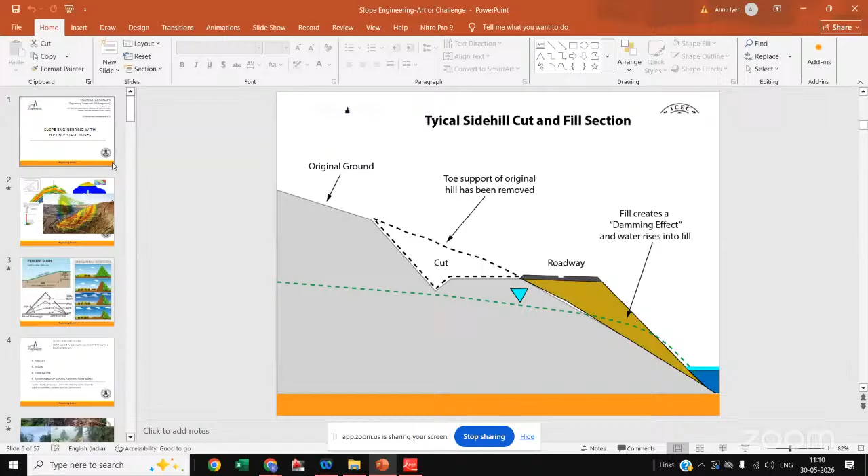So as we discussed, we will be speaking on slopes. Any railway infrastructure, or say any infrastructure, not only railways: roads, highways, or any industrial development area, or even a residential building development, of course railways, airports, mining.

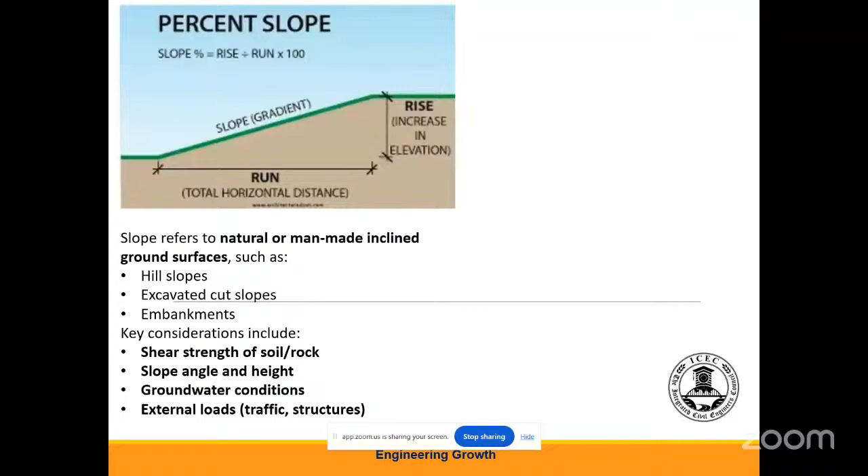So these are all the considerations we need to understand when dealing with slope engineering - groundwater conditions, whether it's at ground level or in some desert area where groundwater might be very deep. And loading conditions - what are the loading conditions, whether there's a lot of load or no load at all. Suppose shear strength of soil is high, slope angle is low, height is low, no groundwater, and no external loads - then we need not go for extensive engineering in that slope. But if it's the reverse case, we have to look into that. So these are the criticalities we need to understand.

Now coming to slope engineering - it is basically a specialized branch of geotechnical engineering. Geotechnical engineering has many subdivisions - slope, foundation, and foundation itself has many types, either shallow foundation or deep foundation. So many aspects are there in geotechnical engineering. In civil engineering itself there are 7 sub-branches, and within those sub-branches there are multiple further sub-branches.

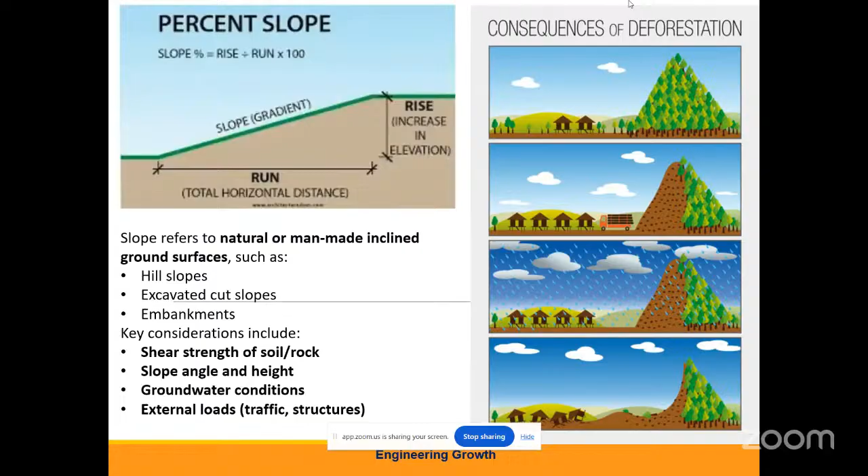Then comes the design - you take soil parameters, model whatever conditions are there at the site, and then run the slope stability analysis to find out whether the slope is stable or not. If not, you have to go for stabilization measures. And does it end here? No - analysis, design, stabilization are just the initial part of it.

Then comes the major part - maintenance of natural and man-made slopes. As I said, it's a continuous degradation process. However much we protect it, we're trying to increase that time period or reduce the effect of weathering. But maintenance is as important as analysis and design. So slope engineering deals with preventing slope failures.

So when we talk of slope failures, these terms come up - landslide, collapse, rockfall, erosion. Are these the same? No, all of them are different.

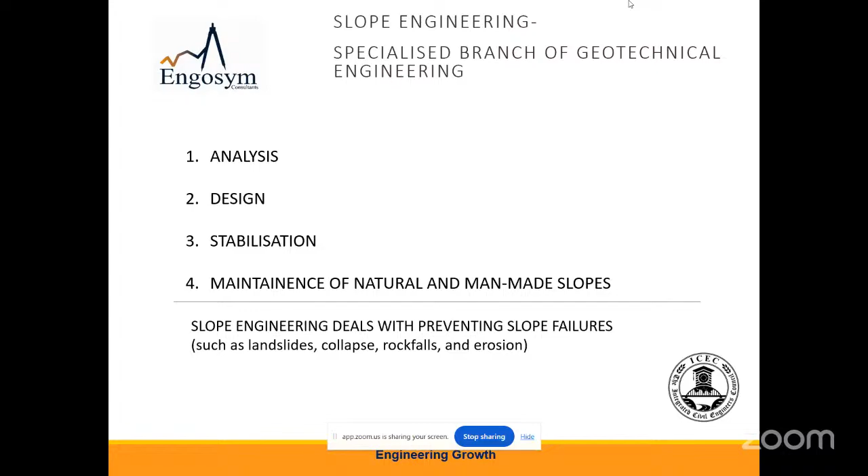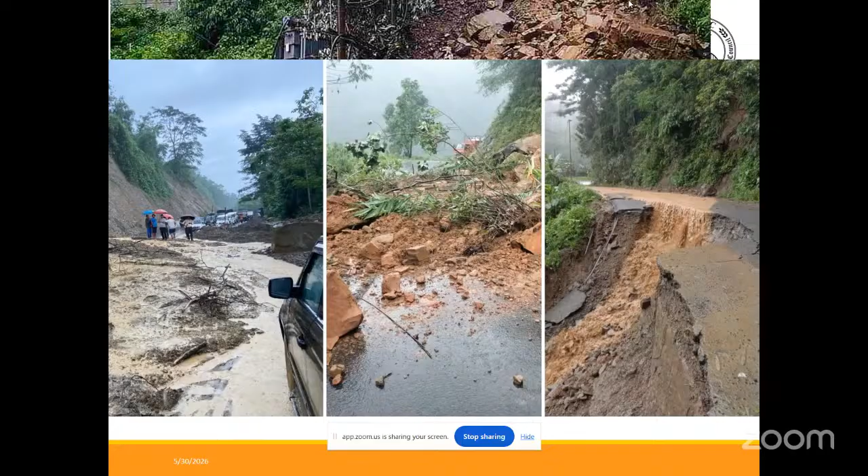Now this is a typical sidehill section, let me explain. Instead of a roadway, you can consider a railway - of course railways are not this critical, but we can still deal with such conditions. You can see a typical cross section here. In this cross section, what we see is the original ground. This is a typical hill road, or you can imagine it as development of a railway through a hill cutting.

So now to extend this existing roadway, or for widening of the existing railway line, we'll have to cut - we have to cut the slopes from this location. It's coming towards the inside of the slope, and in that case what we are doing is removing this base portion.

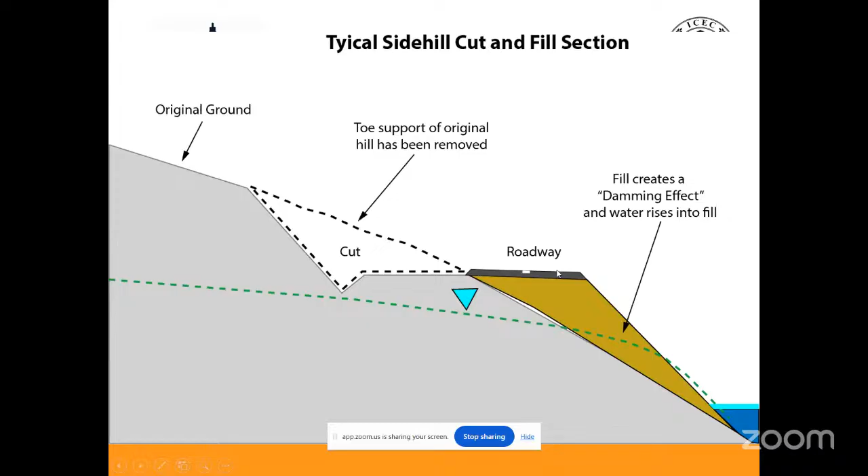Okay, so thank you whoever answered, thank you very much. So now mechanics of slope failure. We have understood that which are the portions to be treated. Now let us understand how slope fails.

So when we have natural terrain which is not suitable or which is prone for failures, in addition to the climatic conditions, when I say climatic conditions, it is not only monsoon, it is also alternate wetting and drying condition. आपण स्नो एरियाजमध्ये पाहिलं, जेव्हा आपण नॉर्थमध्ये जातो तिथे स्नो आहे.

So what happens is in winter season, this snow material enters into the pores, and in summer season, these snow or this ice material which is now in between the pores starts melting, and it starts moving from its place. So this is again a climatic condition which we need to deal with. So we are very familiar only with rains or monsoon, but there are things beyond that as well.

Then we have seismic coefficients and definitely the human intervention. So all this together, it can become very conducive. When I say conducive, it means a favorable environment that can lead to highly unstable conditions in the hillside and the valley side. So how can the failures occur? So this is a slope failure, a typical slope failure.

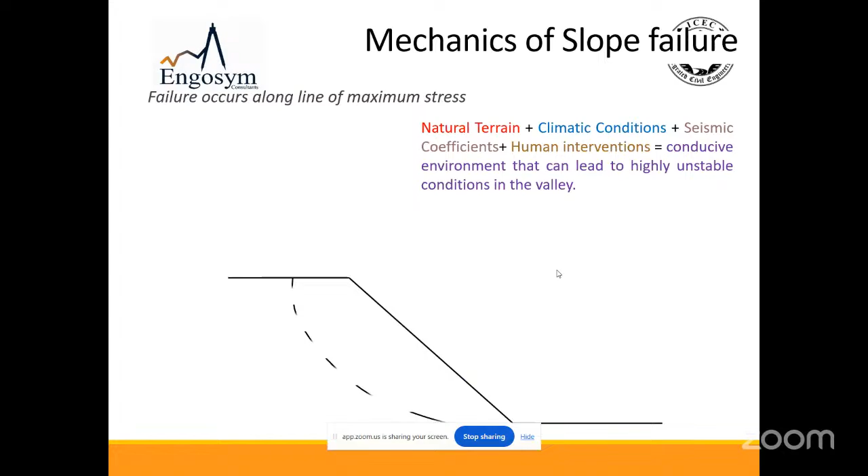Localized failures aside, depending on the terrain and climate condition, the amount will vary, whether it will be a smaller amount of slope failure or a bigger amount. Okay, so this is about the mechanics of slope failure.

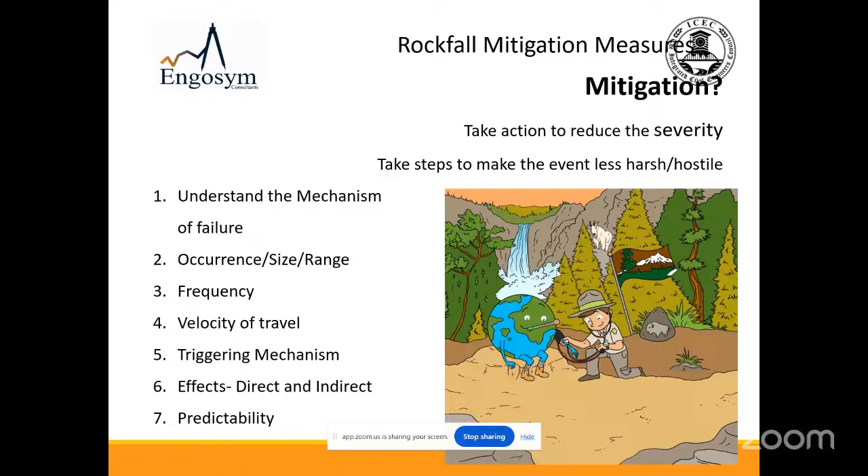Coming to landslide measures and how to do that. When we are talking about rockfall mitigation or landslide mitigation, it is very necessary to understand the strategy of it. That is, how do we map it, what is its inventory, what is the susceptibility, and how much hazard and risk. Then geotechnical evaluation, a very, very important parameter.

In geotechnical evaluation, there are again a range of tests that we can do. It starts with geotechnical investigation, geophysical evaluation, site survey, then understanding, as I said, the triggering mechanism, and finally the effects. So these will form the strategy.

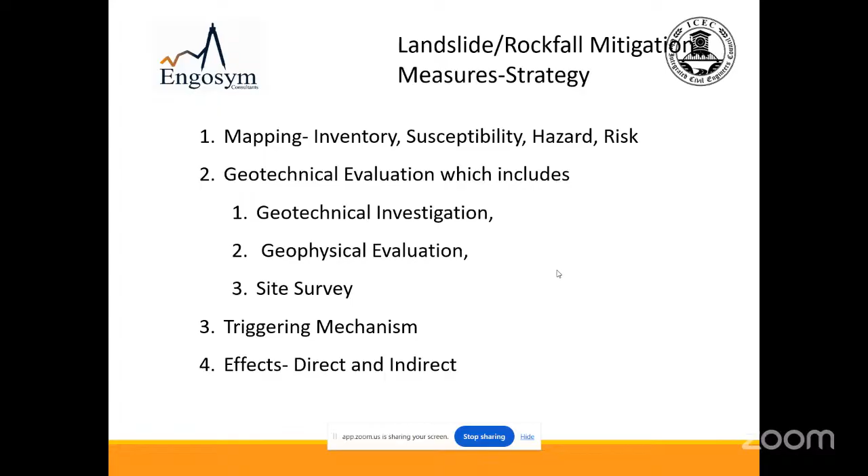Once all this study is done, we will form the strategy for what mitigation measures to give. Why I am stressing this much on strategy is because, when we are talking of these mitigation measures, there are a range of methods that you can adopt, and its costing, its installation procedure, its timeline, all of this depends on that strategy. It all depends on this strategy. All the other factors are depending on it.

Now, coming to mitigation measures. So, when I talk of landslide mitigation measures, it comes under three different heads, that is earth slope stabilization, rockfall mitigation, and debris flow mitigation. Okay, so now when I talk of earth slope, it is more of soil, less of rock.

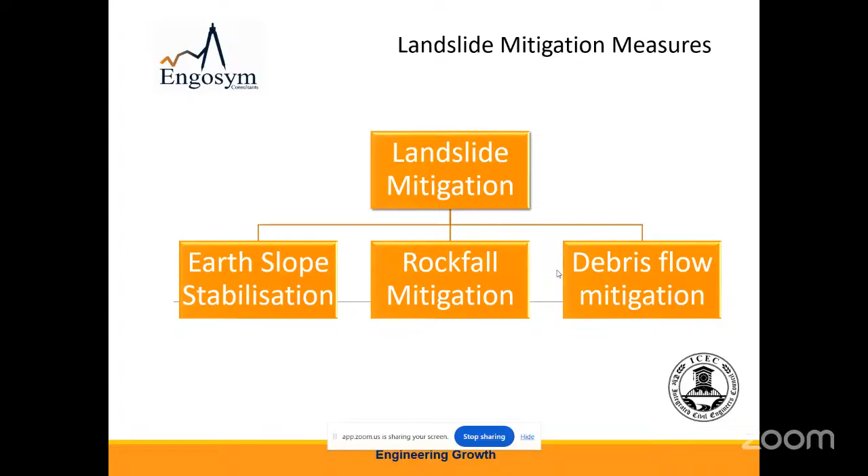Because its velocity, its intensity and the volume is much higher in debris flow. Okay. So now coming to the treatment measures. As I said, there are three things: earth slope, rockfall, and debris flow. Accordingly, the treatment measures will also vary. So when we talk of earth slope treatment, it starts with excavation. It's the simplest method: excavation, cutting, berm formation, and some light treatment measures. That is removal of the soil from the head, reducing the height of the slope, forming benches or berms in between, and flattening of the slopes.

Then we have strengthening and slope stabilization; we will see that in the next slide. Now excavation, generally in railways, is the most adopted method of earth slope treatment. Why? Because in excavation, when you are removing the soil, reducing the height, giving the benches, or flattening the slope, you are reducing the probability of failure at a later date very much.

If you remember, in earlier slides I said that we cannot say that it is 100% safe. So then how much percent safe? In the excavation procedure we can say that it may be 90% or 95% safe. But when we go for strengthening of slope and slope stabilization, this probability may sometimes reduce. And railways generally go with a higher factor of safety, much higher as compared to roads and highways, because they have a lot of limitations, and whatever is at stake is much higher.

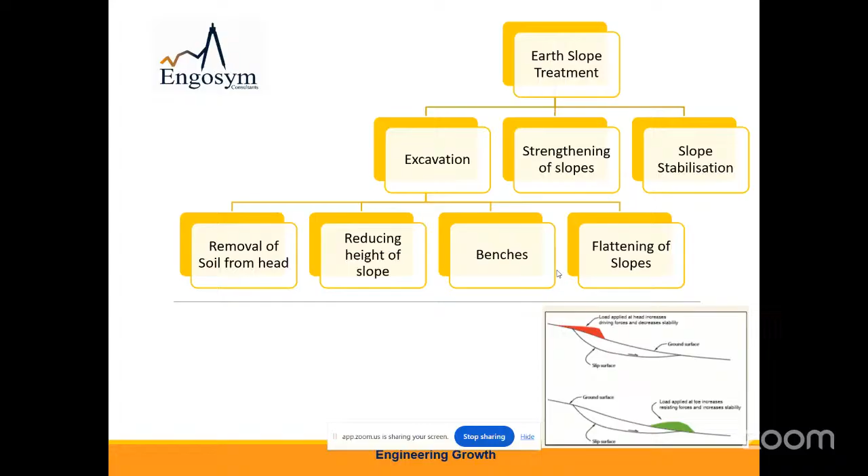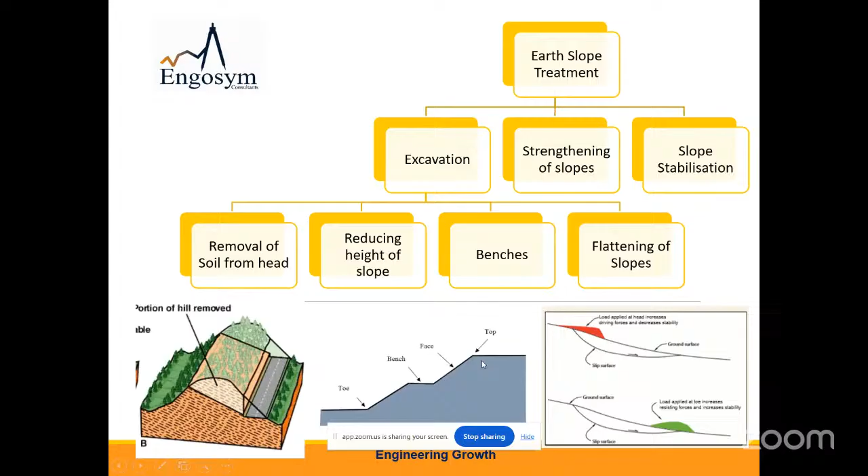This is normally followed. Okay, so this is a typical cross section. You can see that the slope is excavated, we give a gentle slope, give a berm, and then again a slope. Now coming to landslide mitigation measures, what can they be? So determine the treatment. For that we have to understand whether it is a soil mass or whether it is a weathered rock.

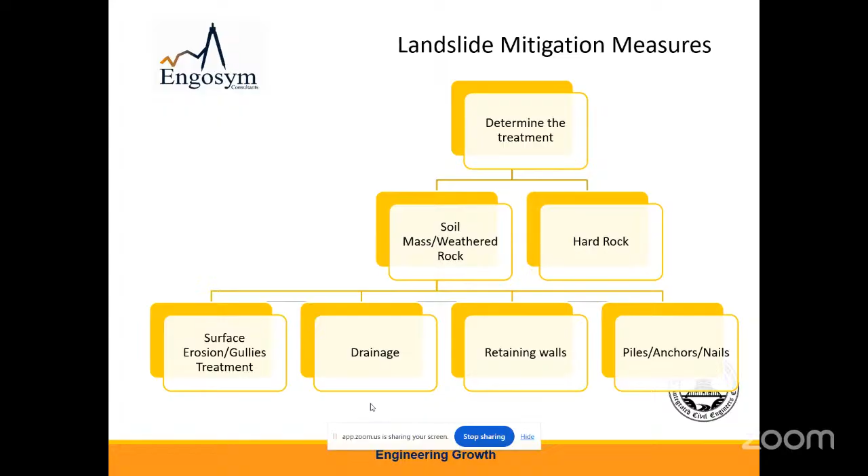So, which are the guidelines? Basically, whatever this presentation has, it is IRC SP 106, which I have followed. But this is for road guidelines, that is Indian Roads Congress. IRC stands for Indian Roads Congress. I will also show you the guidelines for railways. Okay, but here they have given it in a very systematic way.

That is, if you see the list of remedial measures, it starts with modification of slope geometry, then goes to drainage. You have to look at the retaining structures, and finally, as I said, the more complicated treatment, that is internal slope reinforcement, which can be rock bolts, micropile, soil nailing; there are many types of treatment.

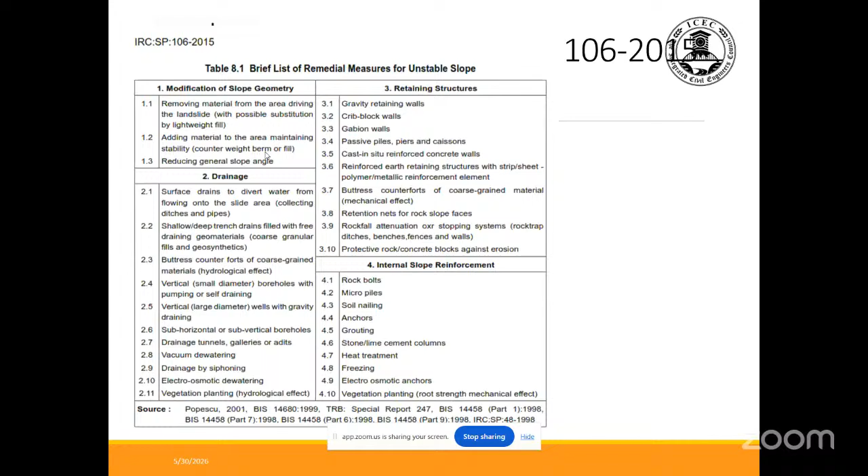Okay, so now you would have understood why strategy, understanding the site and that analysis part is so important. Because now what we are dealing with is the design part and finding out the solution. So that will take time unless we are understanding the analysis part. Unless you're doing all those things, you can't find out the remedial measure.

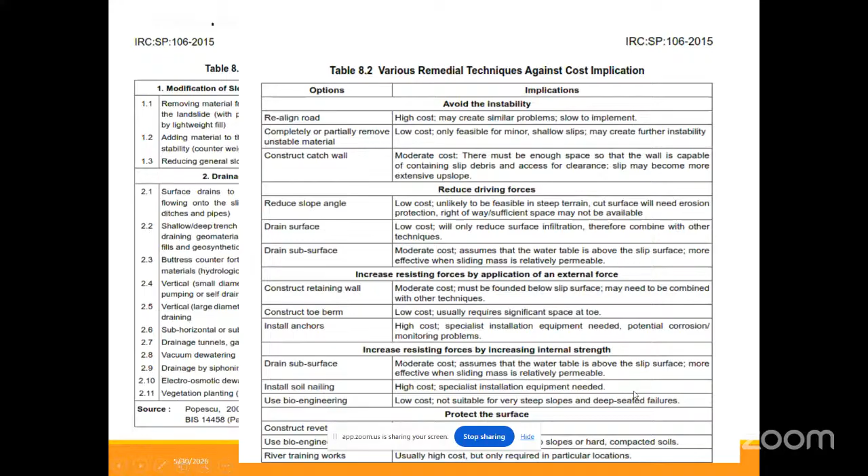So these are the implications when you're choosing what option you want to go ahead with. So now, when you go with weathered rock, what could be the treatment? Same, it starts with surface erosion, it goes to drainage. Now in surface erosion there are many ways you can treat it. You can go with bioengineering measures, or wall plus bioengineering. What is bioengineering? Bioengineering is treating the slopes with natural material. Apart from bioengineering, there are other measures like shotcreting, concreting.

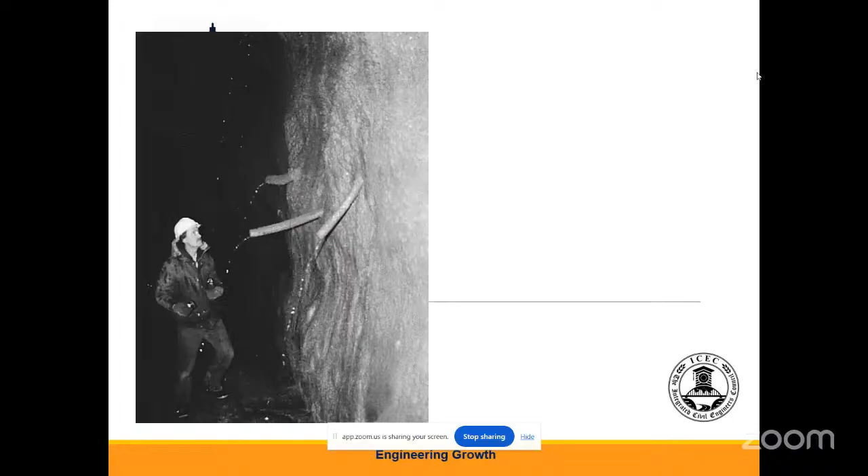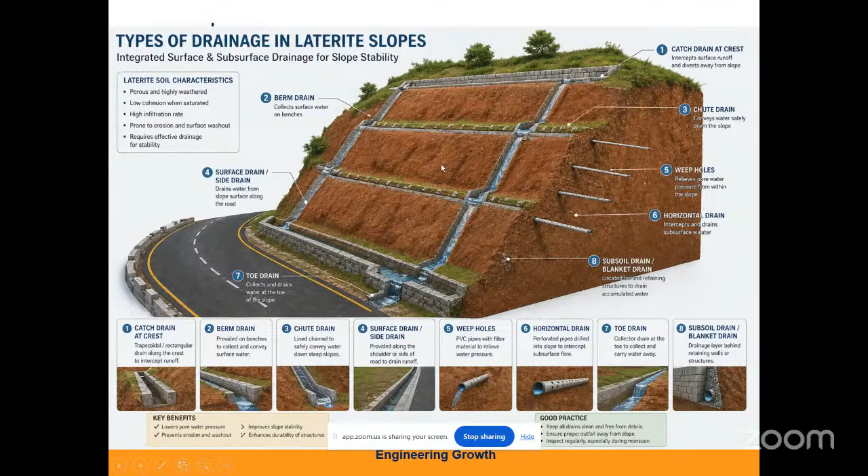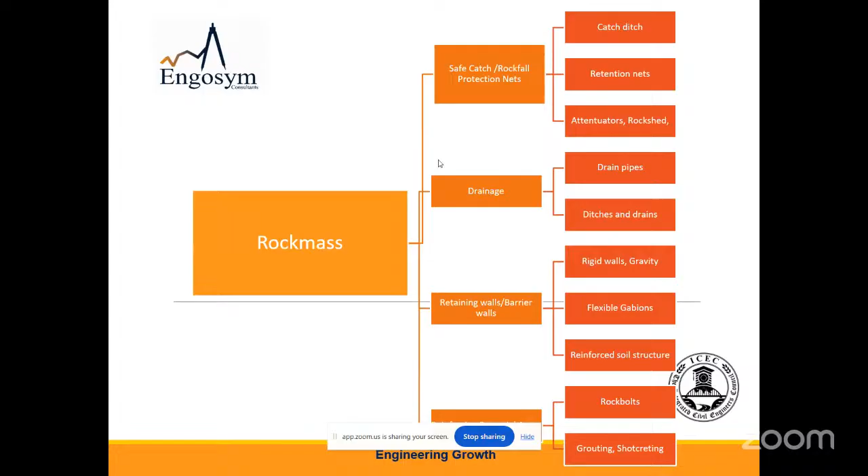Now, apart from that, they have also dealt with a lot of erosion control measures. So all these combinations which I have explained in the previous slide, they have adopted because they have dealt with soil mass, weathered rock, rock mass. So almost all the combinations you can see along the Konkan Railway route. So these are the engineering measures that they have adopted along with the slope protection. This is not the only typical example that I'm showing.

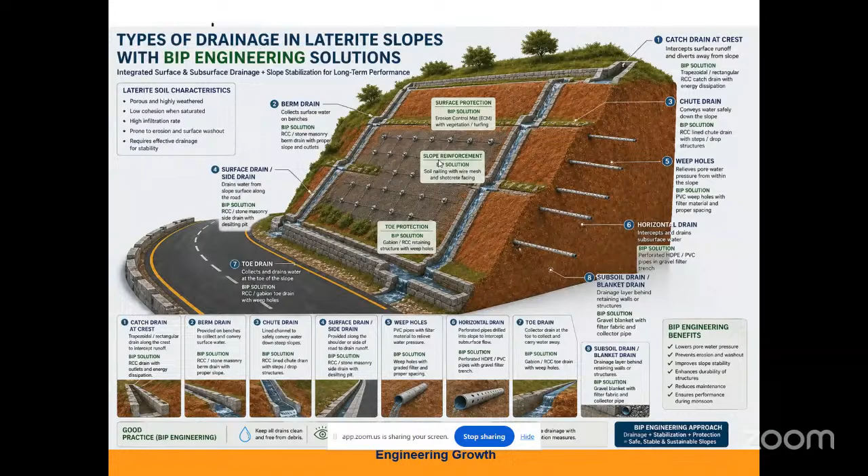Okay, so this is again surface protection with surface drainage; slope reinforcement, that is soil nailing, is adopted. So soil nailing is driving nails within the slope and grouting it, providing some reinforcement to the soil to prevent its movement. And then is that sufficient? No, we may have to give some face protection system also. So it can be shotcrete, it can be a concrete measure, it can be a bioengineering measure. And apart from that, toe protection measures are also given.

So इथे पाहिलं तर toe देणं पण खूप गरजेचं आहे, because over a period of time the toe gets eroded if we are not protecting the toe. And slowly, even if we have provided surface protection measures, this toe erosion is progressive, and slowly the slope failure will progress towards the top of the slope.

Now if you ask me, is this a standard solution? No, this is not a standard solution, this is a typical solution. Depending on the site, depending on the strata, and what is the problem at the site, we will have to look at what best solution, what best combination is needed.

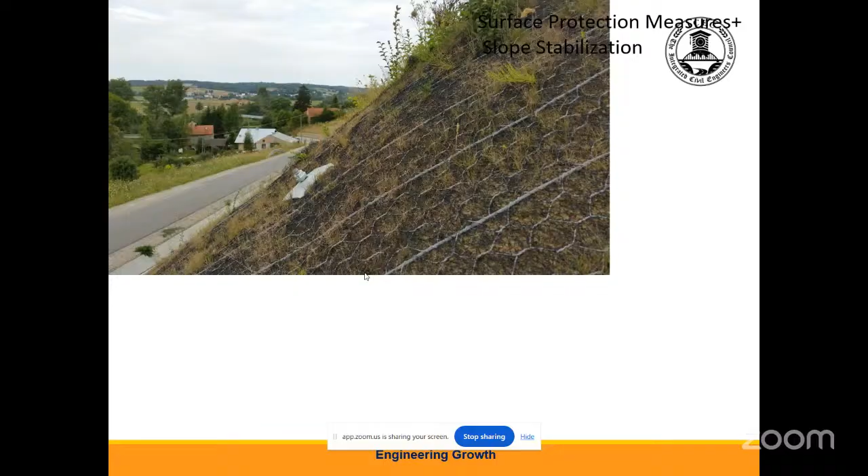Now these are some of the images you can see. So here on the slopes we have provided steel mesh netting, and then erosion control mats are given. Some more images. Similar sites you can see even on the Karjat Panvel route, Konkan Railway, Northeast Frontier Railway. Some more images.

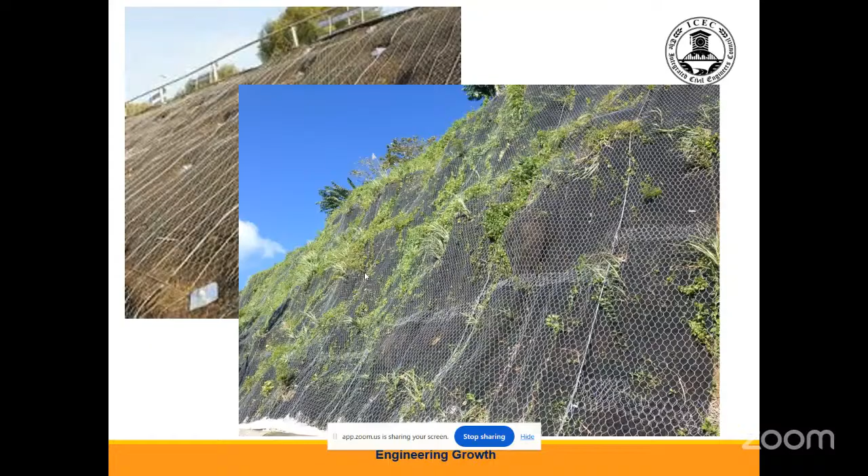If it is soil with high water absorption capacity or high infiltration rate, then it is advisable to go for flexible. Shotcrete is not advised over there. If you have a moderately weathered strata, or a less water absorbing material on the surface, a rock surface, then you go for this kind of shotcreting. Some more images you can see.

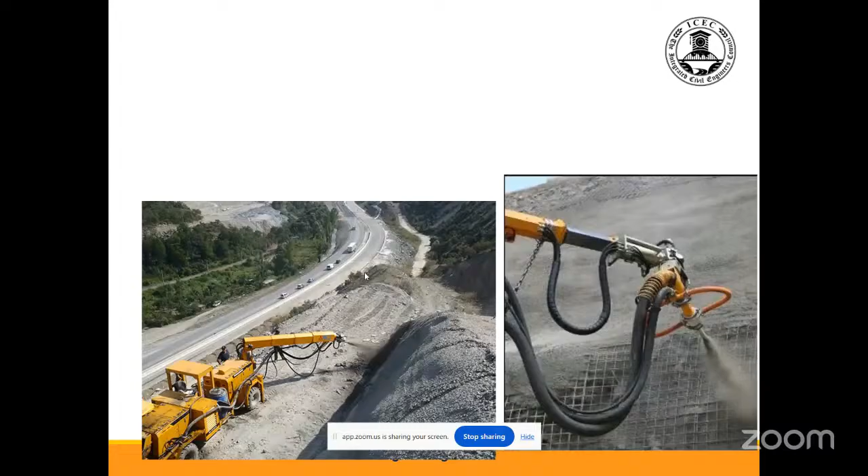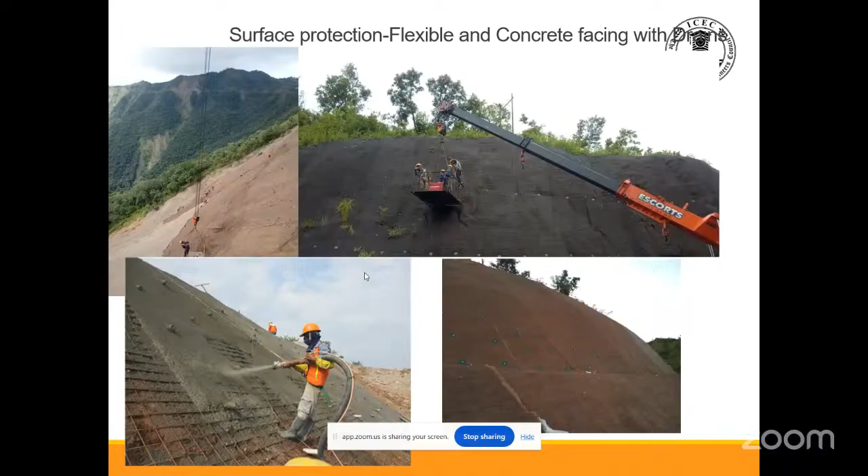So this is a typical rockfall protection net being installed at the site. These are installed by expert climbers who will have the safety protection measures. They will go to the top, first create a safe access for themselves, and only then start such excavation and laying works. These are very expert jobs; we need highly skilled labour for this.

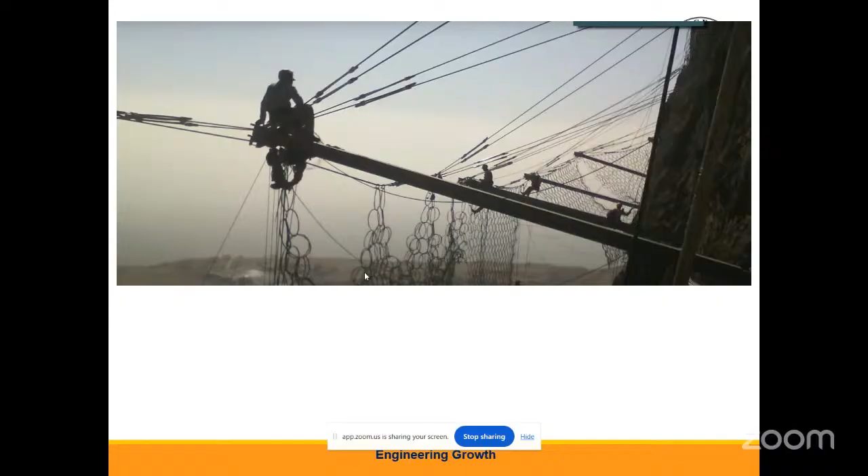These are basically preferred at locations where we can't judge the movement of the rockfall. That is, we are dealing with high slopes, and the trajectory of the rock movement is not easily predictable. Or if those areas are inaccessible, these barriers are quite useful.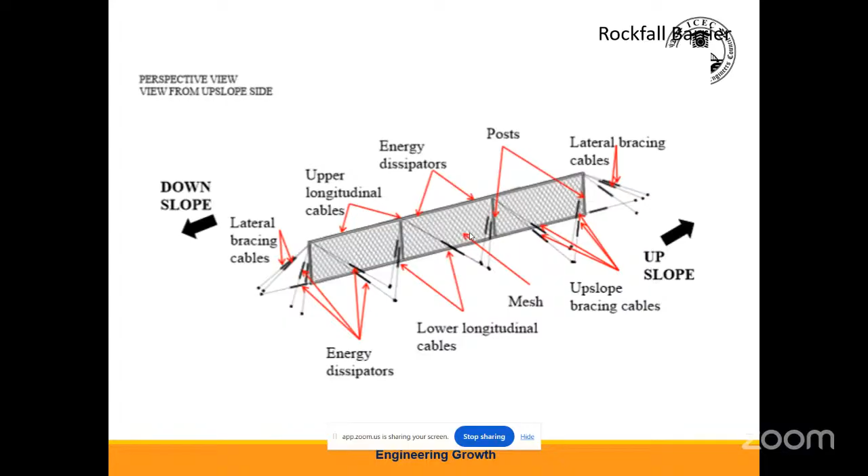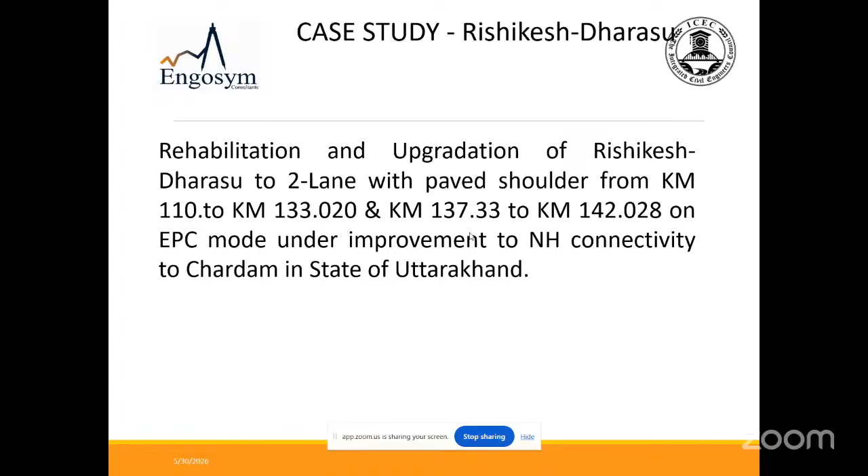A typical case study of road development here you can see. This is for NH connectivity of Char Dham in the state of Uttarakhand. This was basically for embankment; till now we were talking about slopes, this is about embankment stabilization. Char Dham: Yamunotri, Gangotri, Kedarnath, Badrinath. The stretch in discussion is the Rishikesh Dharasu section.

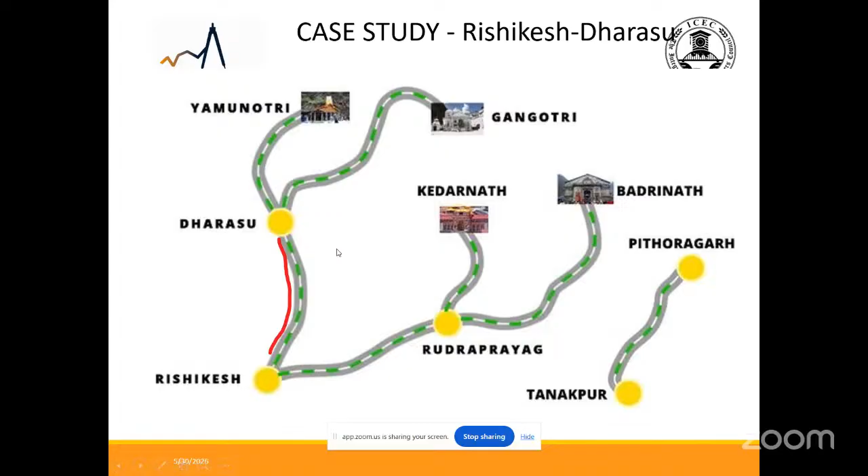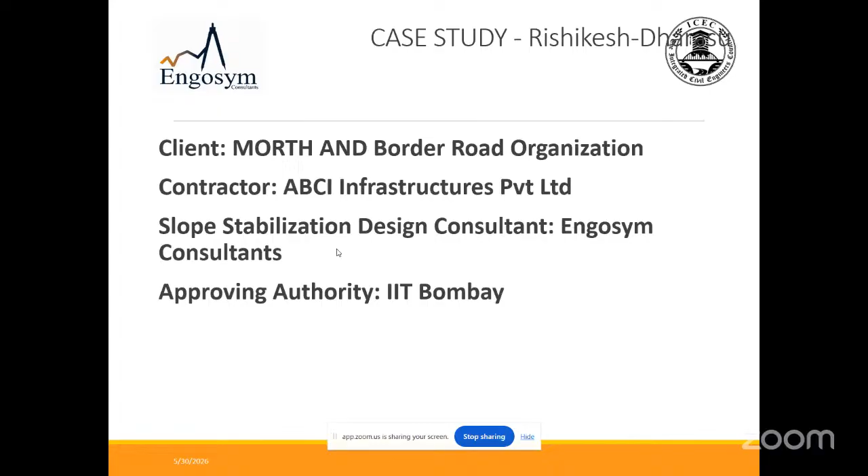The client was BRO, and the contractor was ABCI. The scope was slope stabilization. The approving authority was IIT Bombay. Here you can see a typical cross section. Just imagine it to be a railway embankment extension; this we are talking about is a roadway extension.

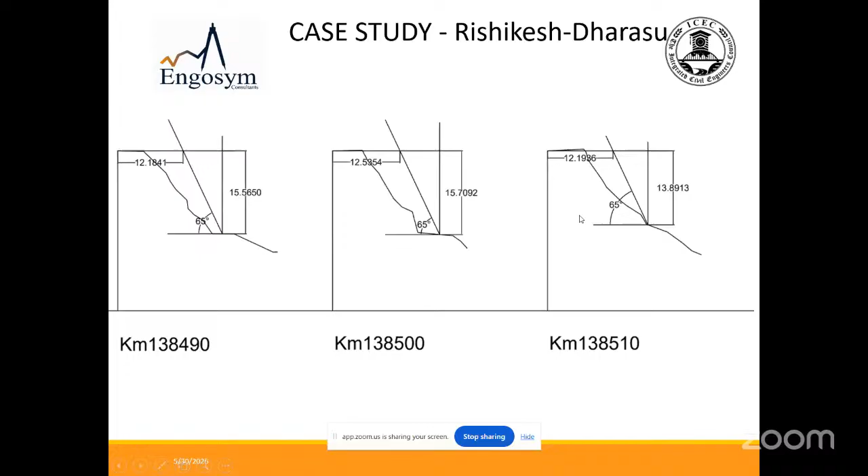The filling was about 15 to 20 meters, and the space available was not more than 4 to 5 meters. The existing slope was about 65 degrees. So we had to use the space available, 3 to 4 meters, and stabilize this high embankment. The area was a steep slope, with the valley side along the river Bhagirathi. The protection was required to support road widening.

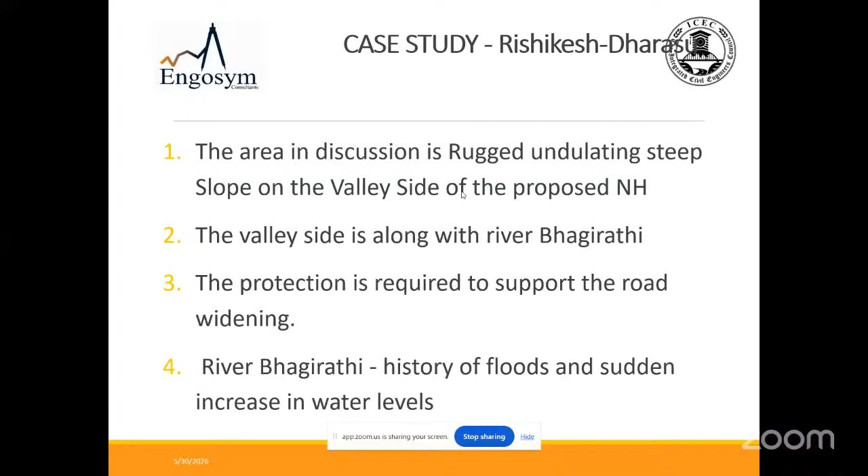So what was the system adopted? It was an advanced version of reinforced soil wall that we call a shored MSE wall, that is, shored mechanically stabilized earth wall. These are the guidelines available, given by FHWA, the Federal Highway Administration.

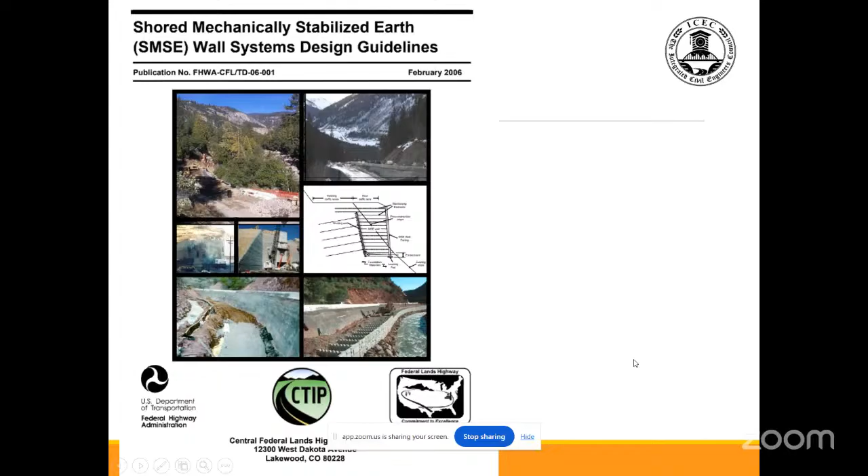So how do we protect it? We don't have sufficient base width here. The height that needs to be stabilized is about 15 to 20 meters. So the base width will be somewhere around 14 meters. Okay, so 20 into 0.7, a thumb rule if you say, it will be about 14 meters. In case of railway, it will be much more. The base width is about H. That is, if it is a 20-meter high cutting, you need base width of 20 meter, which is not available here. So how did we stabilize it?

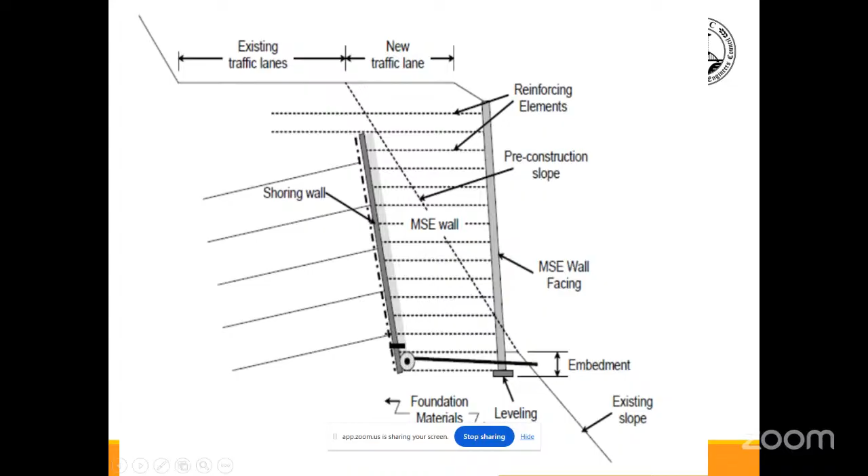So first we have anchored the existing slope, so that the lateral earth pressure from this side is reduced on the retaining structure. So nail it, shore it, and then create a new structure and connect these two. So this is again quite specialized engineering, that is SMSE, that we call shored mechanically stabilized earth structures.

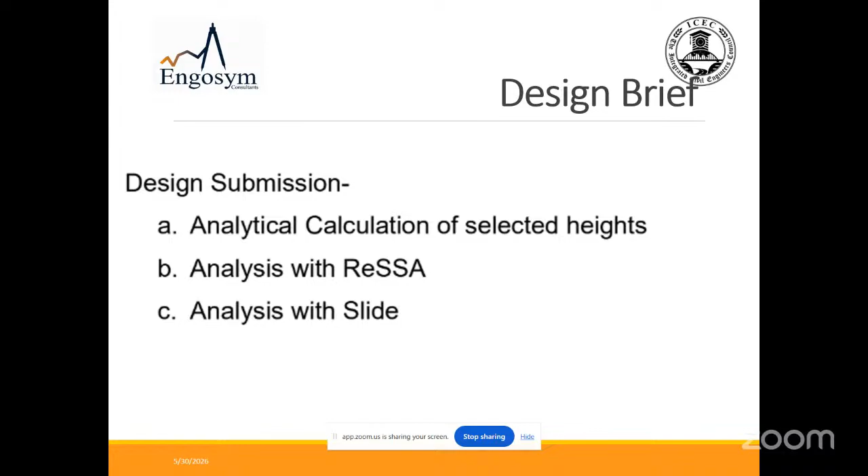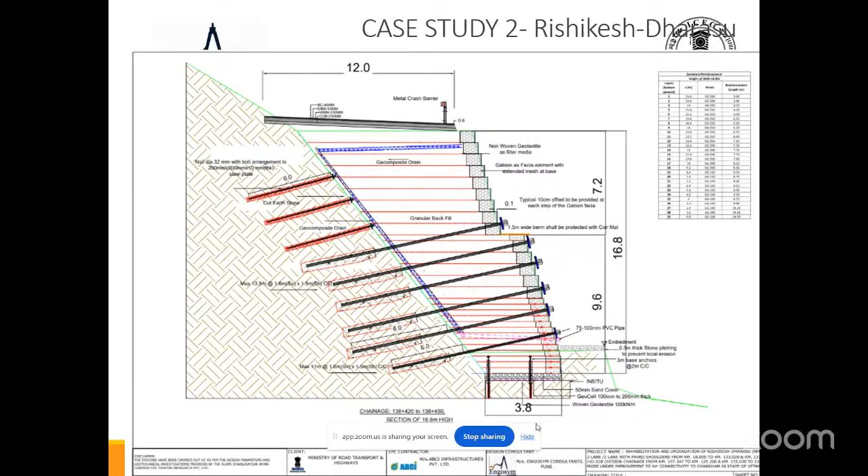So we have to look at a comprehensive way of doing it. First you check the stability of the existing embankment, then you model the new embankment and do a combined check. So the checks will be sliding, overturning, bearing capacity, and global stability checks. And as for the foundation, as it was rock at the base, we need not go for a detailed foundation preparation, but still, a minimum preparation was needed. We gave a firm base of geocell, and then the vertical anchors were provided.

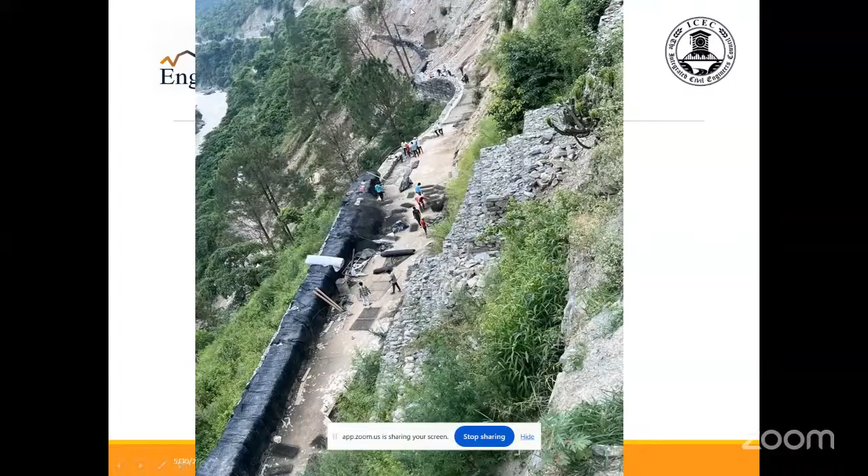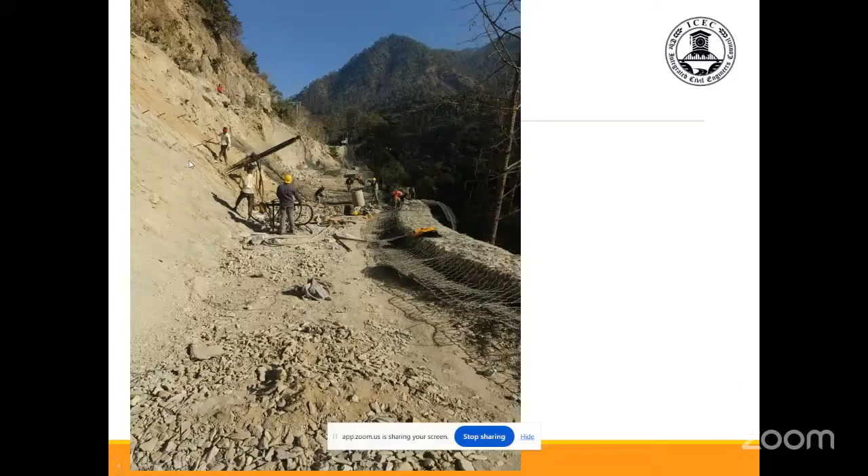Some more images. So here on the fascia you have this gabion fascia, and then we have geotextile as filter media. And these elements that you can see are geogrids that are provided for reinforcement. So the anchors that you had seen in the cross section are given on the hillside, and then this is the layer wise construction that is being done. So slowly it has come to the top surface.

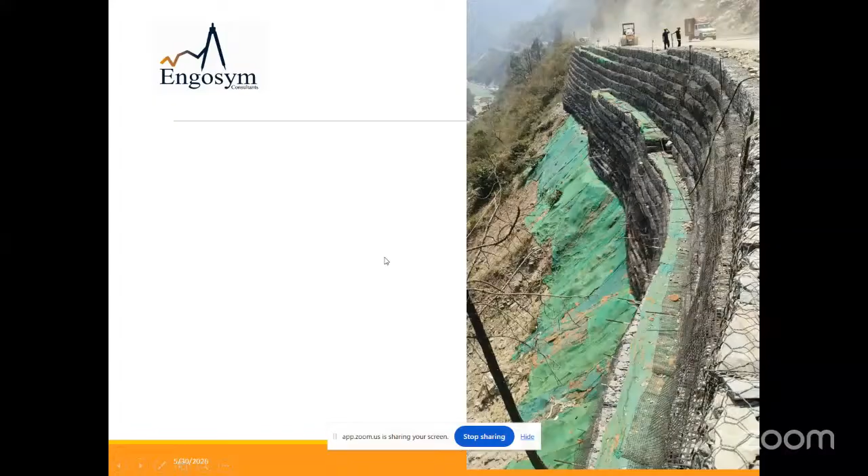So this is a completed structure. The same approach can be taken for railways, but there are certain limitations because we have to go with zero tolerance for any settlement. So these kinds of direct placement of the track may not happen. Of course, if the track is a few meters away, then we can look at these kinds of measures in case of railways, or even the approach embankments can be constructed.

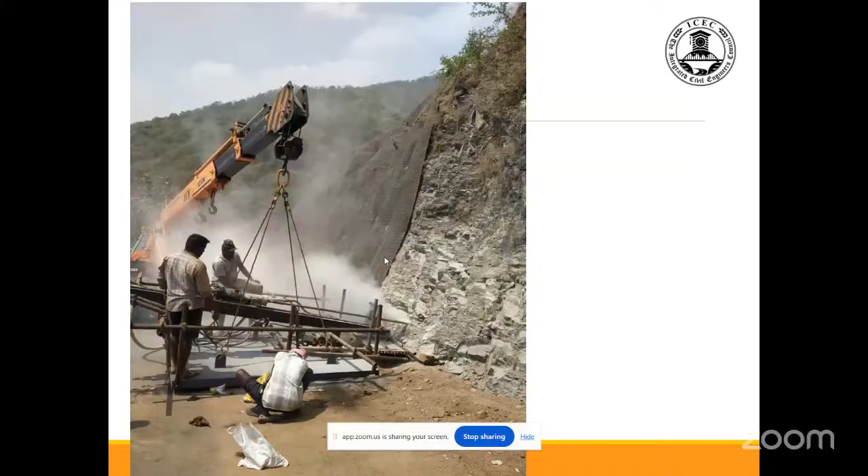So these are some images of slope stabilization works at Palakkad for KSTP. Here you can see the previous image. So rock cutting is there on the cutting side, and then we have planned the protection works with anchoring, and further a surface treatment is given. Now surface treatment, as I said, it can be either flexible or rigid.

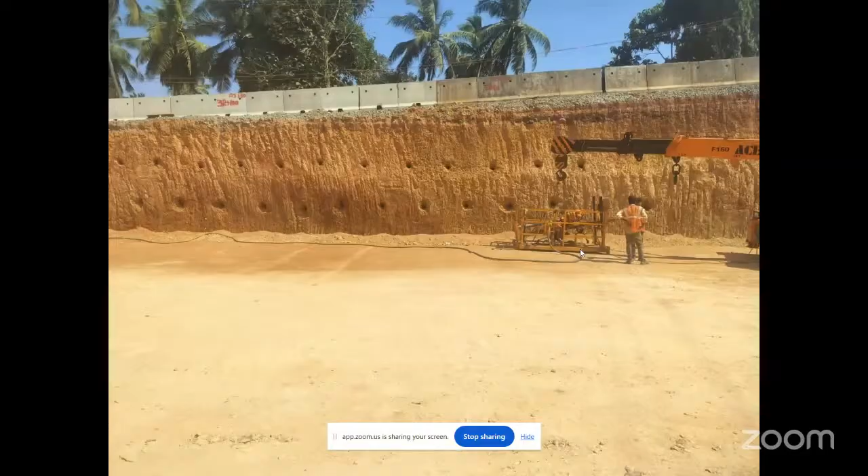So some view of the images. This is for NH. So shotcreting is being done and anchoring is done. I have shown you both the options, that is with flexible fascia and with concrete fascia. So this is with the rigid fascia, or we can say semi-rigid. Where you have less water absorbing strata, you can go with these kinds of solutions.

So when we talk of slope engineering, it has to be a totally integrated approach. First it starts with art. Art means we need to first be able to judge how the ground conditions are varying, whether the erosion is going to be progressive, whether water seepage is there, what are the construction constraints, how you can adjust the slope, whether space availability is there, and what is the access, how to sequence. So all this understanding and judgment needs to be there even before you work on the solution. So understanding the problem and the constraints at the site, and then crafting the solution.

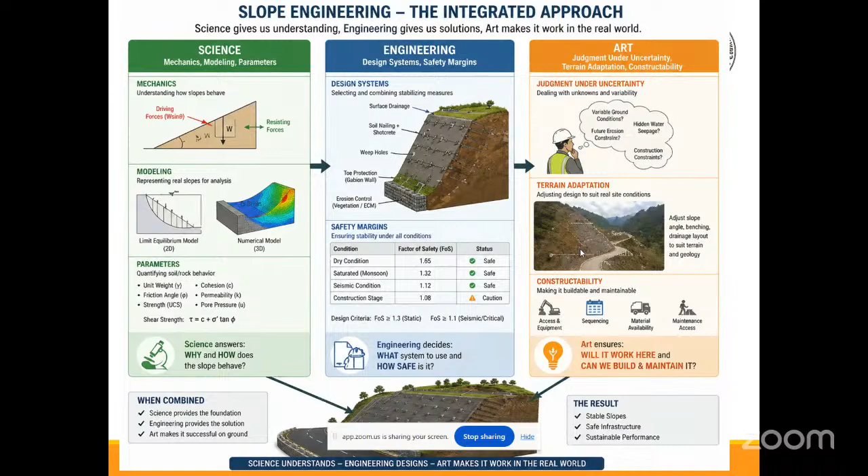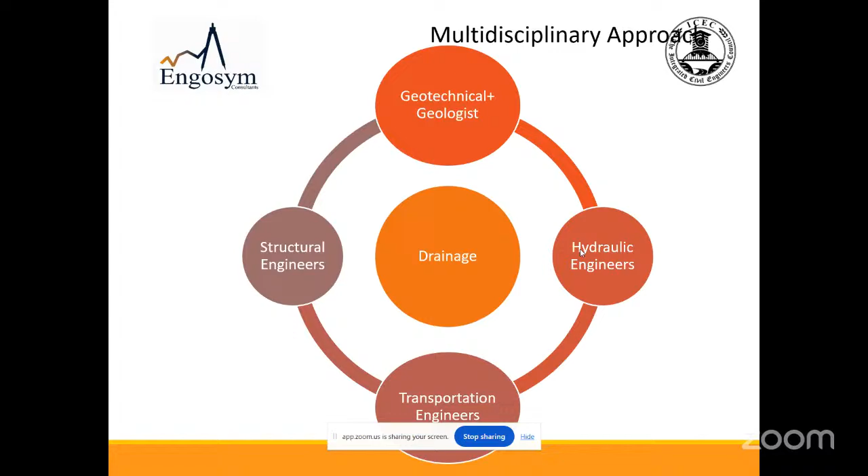So it is a multidisciplinary approach. When you are dealing with such slope strata, whether railways, roadways, or highways, you need to understand and involve the geotechnical engineer, hydraulic engineer, transportation engineer, structural engineer, and drainage needs utmost care. So it is not just a structural engineer's work or a geotechnical engineer's work - you need to pay attention to all these aspects.

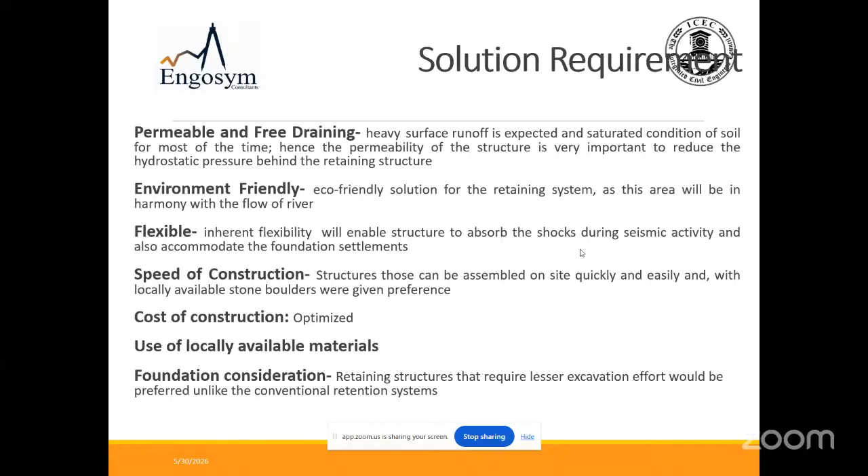So the solution requirement generally is permeable and free draining, because we are already dealing with a lot of water pressure here, so better that the solution is free draining. It has to be as environmental friendly as possible, flexible, and the speed of construction has to be fast. Especially in railways, the speed has to be quite fast, because the working window when dealing with open lines is very less. For new lines it is fine, but if you are dealing with open lines, it has to be very quick. All these factors are very important when dealing with open line construction or development works.

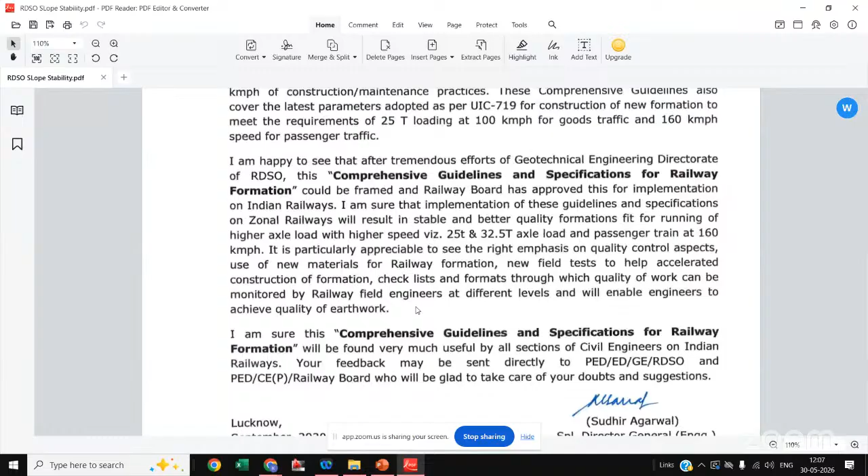So in case of railways, you can see - I hope you would have heard of the organization RDSO. So what is RDSO? This is the research design wing of railways, basically. They are the research wing, and the railway zonal offices, even all offices related to railways, refer to them - RDSO, that is Research Designs and Standards Organisation - and they generally release such guidelines and specifications for railway formations.

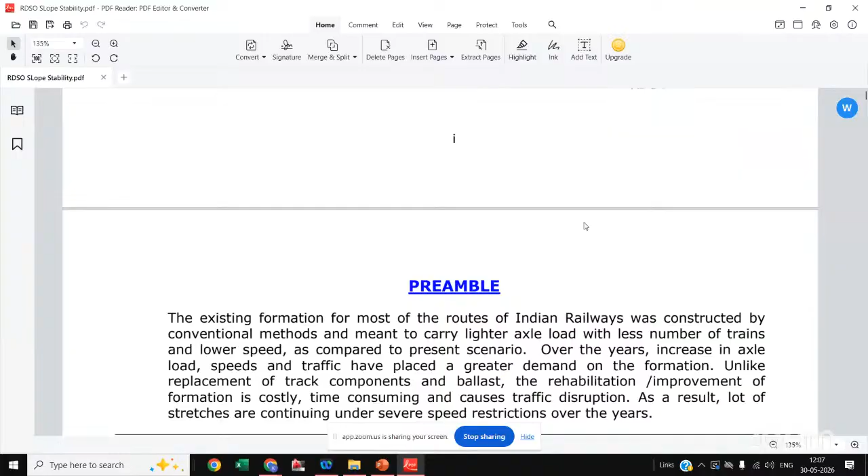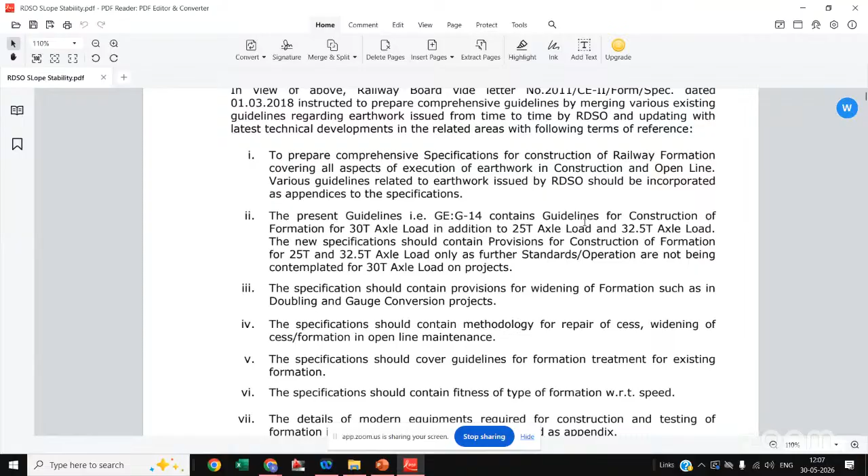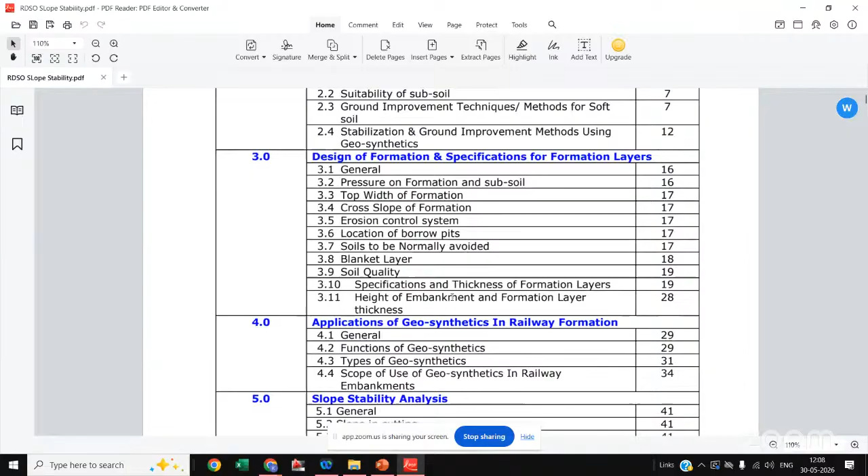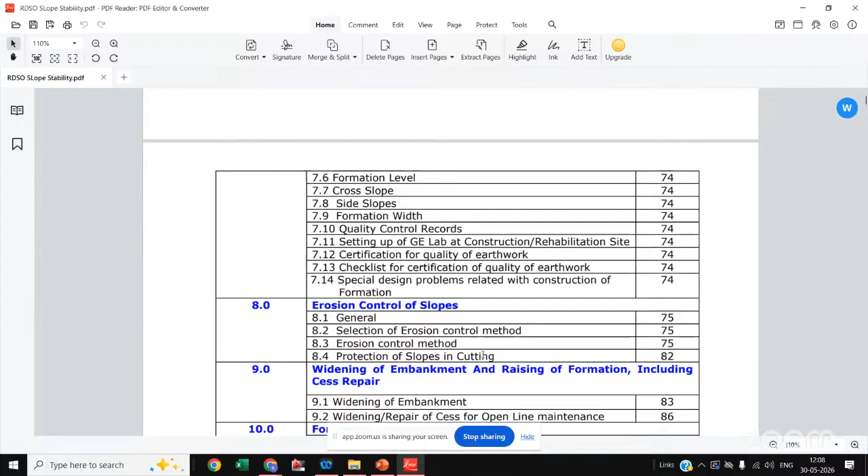This is one guideline for slopes, showing the factors of safety and how to approach slope design. They also ask us to refer to Indian IRC standards, but it's based on engineering judgment. The guideline covers soil exploration and survey, suitability of subsoil - the same approach as in IRC. Only difference is these standards are more specific to railways.

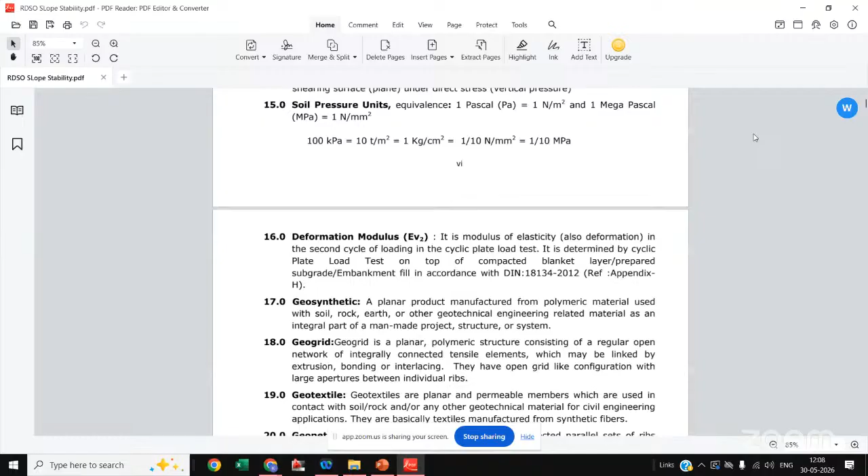All the details are provided. It's a very comprehensive and impressive document. Whoever is interested can download it - it's available on the internet, or you can go to the RDSO website and download this.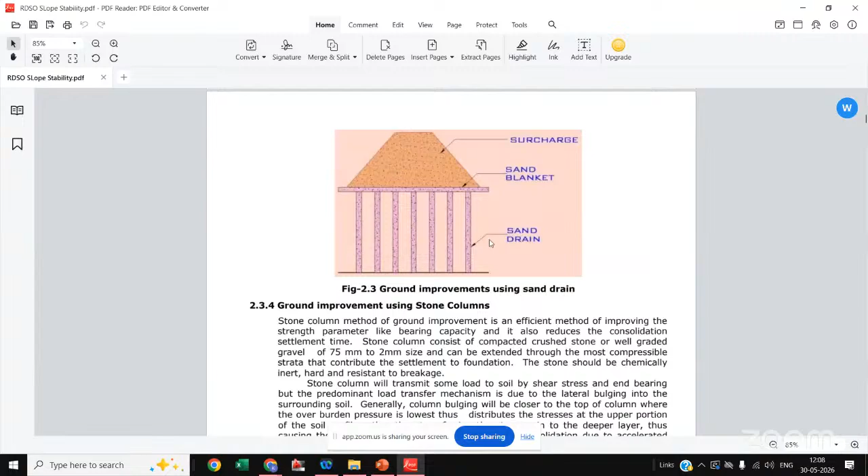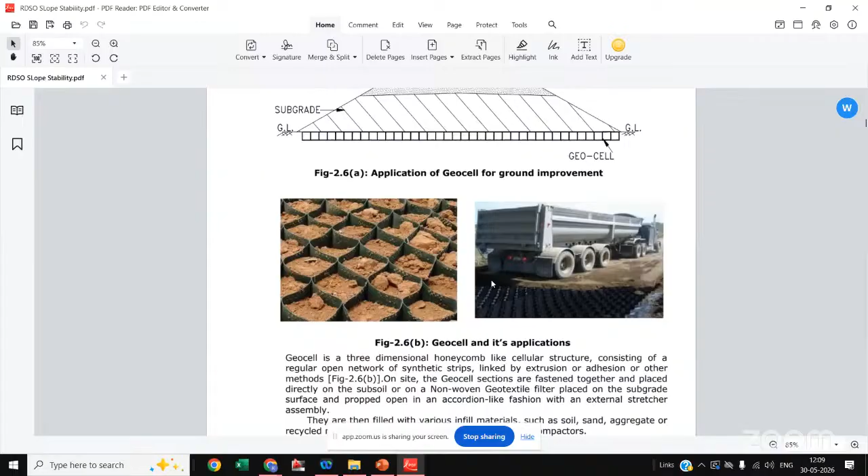They have very clearly given, for railways, what approach can be taken for slopes and ground improvement. As shown in the case study, the geocell used for ground improvement was used there. These are PVDs for ground improvement. Then how to deal with slopes.

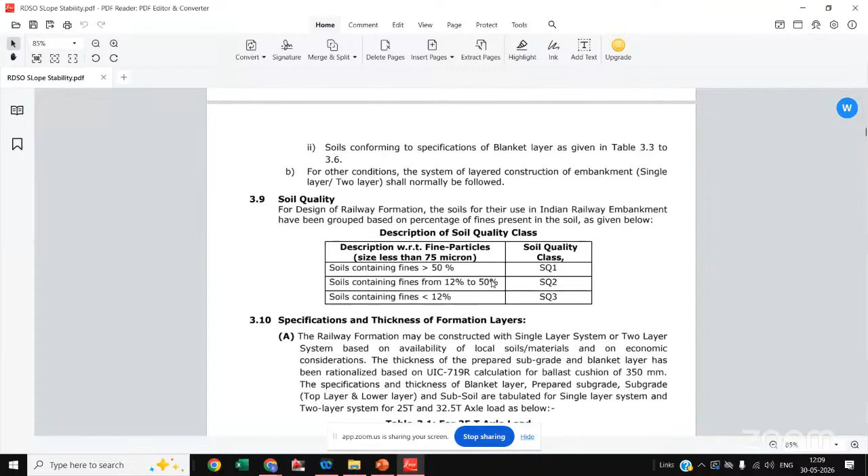This is a very comprehensive document with case studies they have given, showing where it is adopted and how it is performing. All those details are provided in this document, so this can be used.

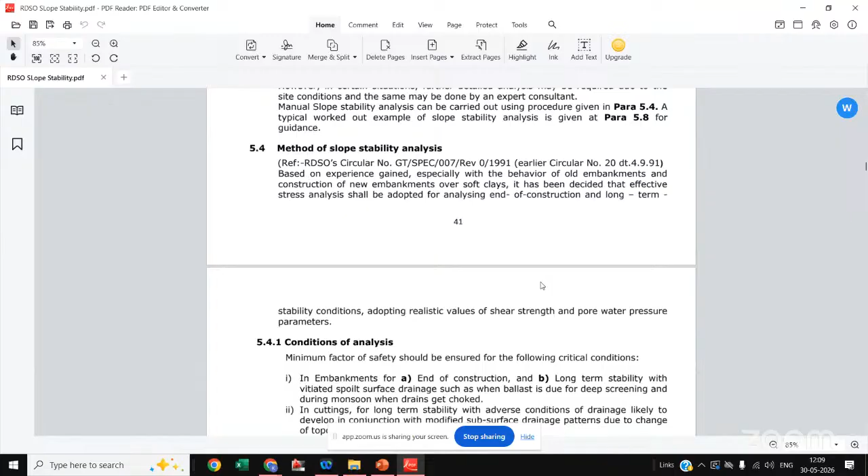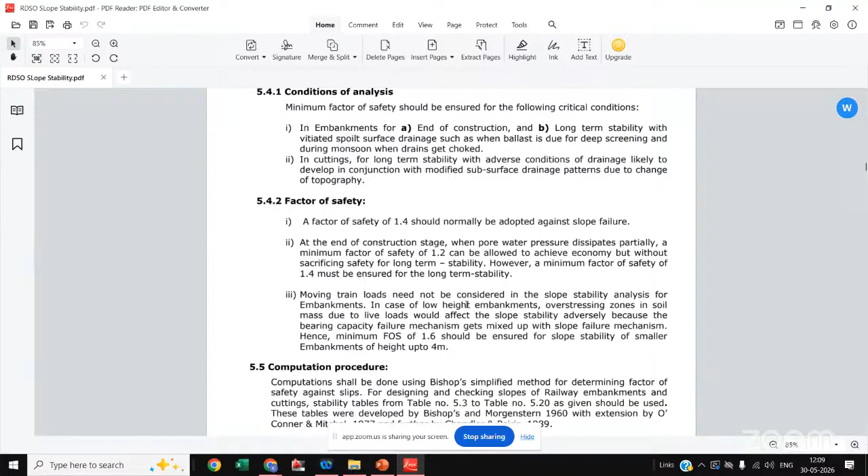Factor of safety is also given here - what should be the factor of safety for slope failure, at the end of construction stage, at the temporary stage, and when the moving train is there. 1.6 should be ensured for slope stability of smaller embankments up to 4 meters in height. Details are given on the computation procedure - Bishop's simplified method. Most details related to slopes are covered.

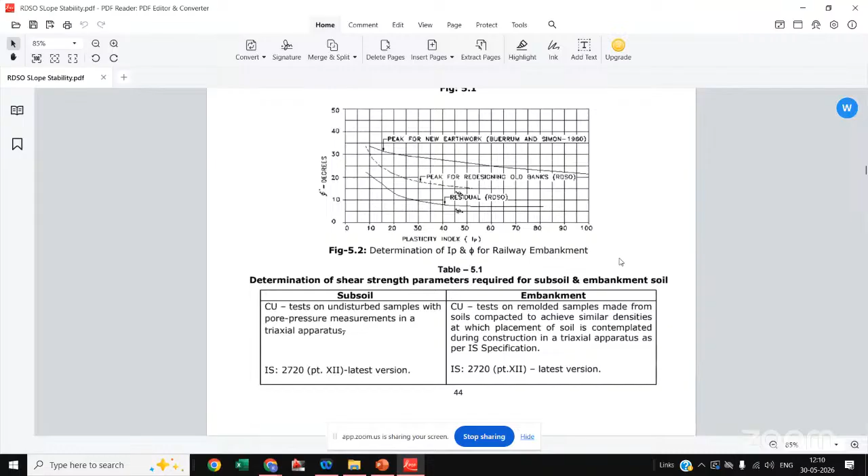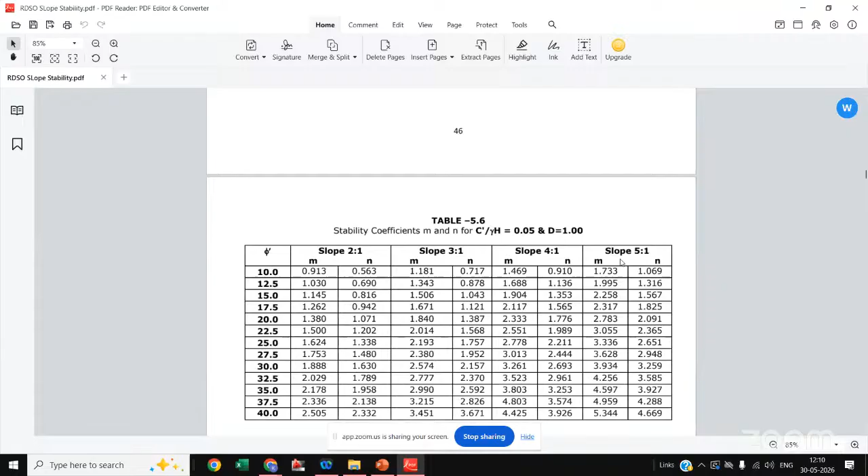I would encourage faculty as well as students to go through this. It's given in very simple language so you can understand it well. That's it, madam, from my side regarding slope engineering. Any questions we can take up.

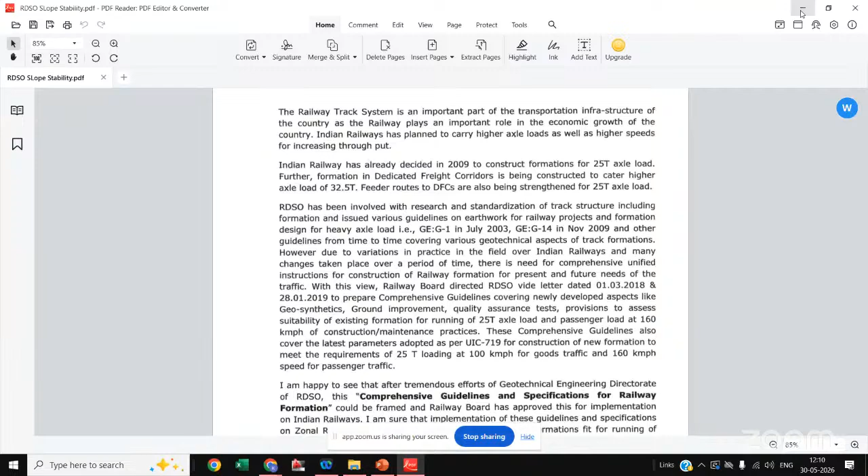Is there any questions? No, madam, thank you so much. Nivas Patil has raised his hand, wants to ask a question. Yeah, okay, please.

Hello ma'am, I have a question. Yes, please. This is Assistant Professor Sandeep Jagta from MIT College of Railway Engineering, Barsi, ma'am. Yes sir, I have a question - what is the effect of cyclic stress, generated by the moving train, on the existing ground and existing fractures in the body of that particular slope portion?

Definitely these cyclic loads need to be considered in the design analysis. Over a period of time, going back to the Konkan Railway example - the formations are on filled up strata or strata strengthened by various methods. There will be dynamic loads that we consider in the design when dealing with railways - especially since in highways we deal with live loads, but in railways it is live loads and dynamic loads. That needs to be considered in the design. The effect is that there will be loosening of the strata, existing pores or cracks will widen over time, and the soil will try to disintegrate. That effect definitely needs to be considered in the design aspect.